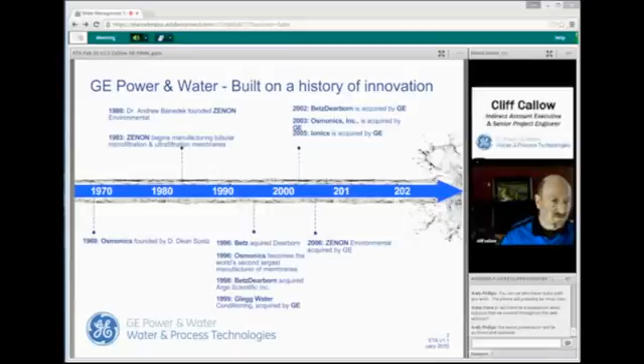So I belong to a group called the Indirect Group, and what that means is we go to market using carefully selected third-party companies throughout North America. These companies are local to you guys. You probably already work with them. They're a combination of OEMs that build equipment and provide solutions, distributors that have our technology on the shelf in terms of filtration, consumables, that sort of thing. We're value-added resellers that do part of the service piece as well. So all these companies allow us to bring solutions to you quickly with companies that are local to you.

Often these small businesses are second and third generation. So it's very rewarding for me.

So I have quite a large territory to cover. I have specialists that help me in doing that - equipment specialists, membrane specialists, filtration specialists. We also have a great inside team, great customer care team, aftermarket parts sales for our equipment and consumables, and then an overall technical support number that anybody can call, or the team mailbox, and look for a solution.

So my team covers North America with this network of third-party companies. There's 8 account executives like myself, 4 specialists, and 2 team leaders.

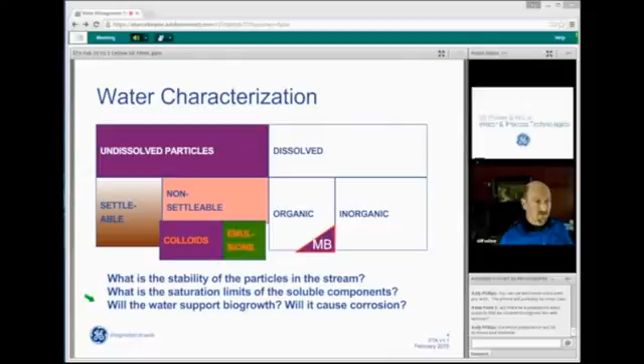Part of looking at a problem - and I learned this when I was at Toyota for a few years - you really want to define the problem in terms of a black box. What are all the inputs? What are all the outputs?

The black box concept helps us really define what this problem is really costing us, and what is it worth to solve. So it leads into the business case, because one of the big inputs and outputs always has to do with commercial constraints. Where does the money come from, where does it go? Could we take something that's a waste product now and reuse it? If we make it more consistent as a waste product, can we reuse it? So variability is a big thing you're looking at when laying out and developing a project.

Again, the first step is getting some data. What are you trying to solve? Some pilot information or trial information, and then getting funding for the project. You'll see a lot of the solutions I'll be talking about in my slideshow are fairly simple, so they're easy to implement. It's not a large capital project, so I think you'll be happy with that aspect of it.

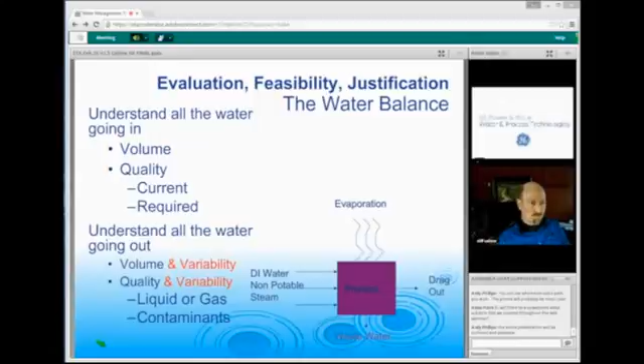So we talk about micrometers or microns. Filtration pore size is usually expressed as microns for undissolved particulates. When you get down into the dissolved materials, you're going to look at them in terms of molecular weight. Think of a molecule, think of a hydrocarbon chain, and so forth. Some good examples, we're all familiar with the size of beach sand, milled flour, how big a human hair is, and the technology to remove those would be some sort of particle filtration.

We'll be talking about depth filtration later on. We'll also be talking about hollow fiber UF.

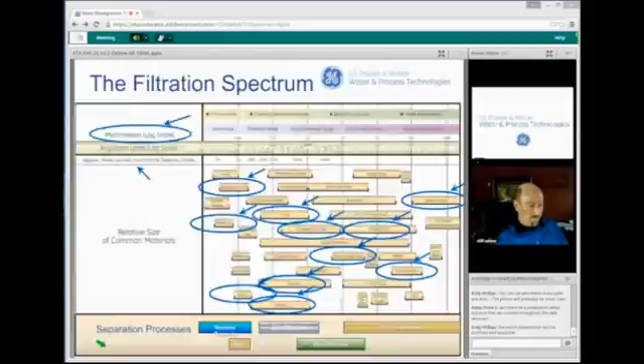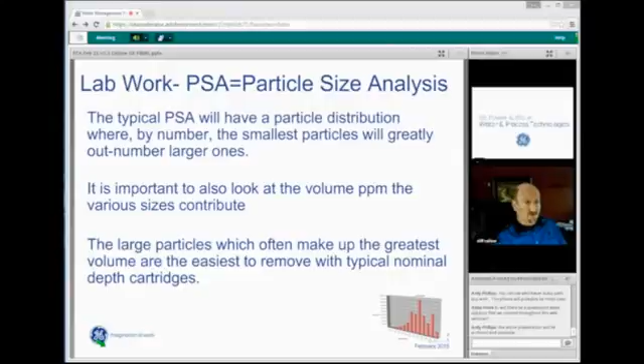Particle volume is important. We're going to see, when we talk about melt-blown polypropylene depth filters, how the void space is really important for filter performance.

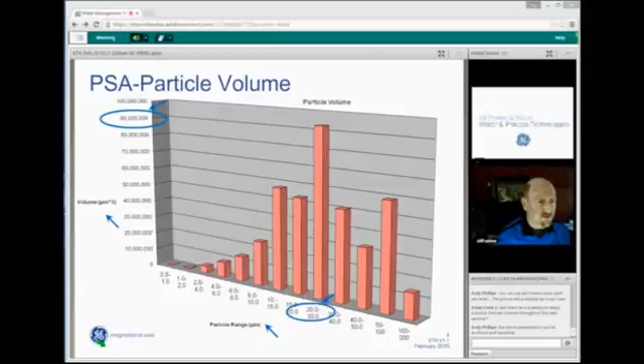And we're going to revisit these topics as we go through the slideshow. I'm just kind of building on this.

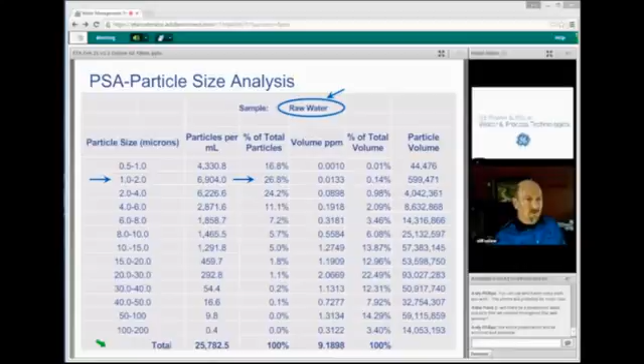Another part of the particle size analysis would be the tabular format. It gives the range of micron sizes in the sample of raw water in this case. In the 1 to 2 micron range, we had almost 7,000 particles per milliliter, which was 26.8%. Looking at these two slides, we'd say we want to remove everything bigger than 1 micron, but we're going to have enough dirt holding capacity to deal with the 20 to 30 micron range, which is where most of the volume is.

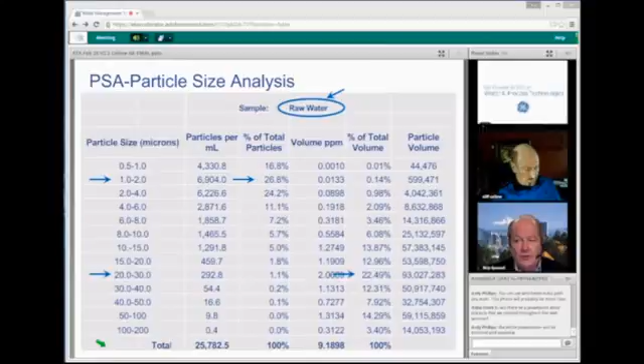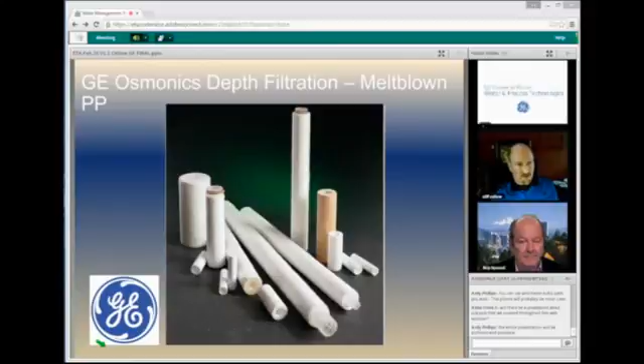So we're going to talk about depth filtration. It comes in a cartridge format, with all different lengths, end adaptions, and so forth. This is a GE Osmonics Heritage product line, made in America, with all the certifications needed for food, NSF. We work with polypropylene suppliers for the purest of materials, so GE is known for its very high quality and good value.

Before I go into how melt-blown polypropylene filters work, I just wanted to show you guys how they're made. It's kind of like cotton candy - we all saw that growing up as kids. It's molten polypropylene formed into a log on a mandrel that's spinning at a slow speed.

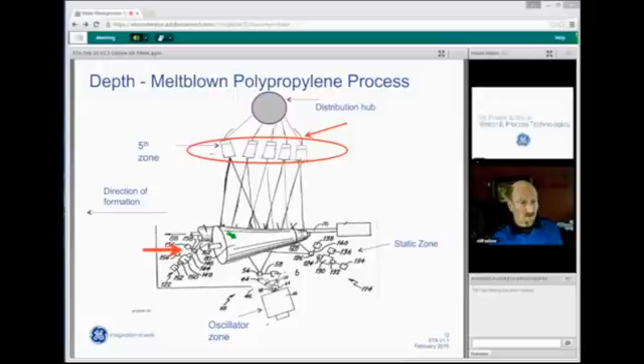At the top you see the heads - these are computer-controlled heads streaming out molten threads of polypropylene, developing a filter matrix along this log on a rotating mandrel. And why do we care? Because it all translates into dirt holding capacity.

In depth filters, the term graded density is important. In depth filtration, we're using the whole working radius of the filter, ideally, to remove dirt. And if the voids are larger on the outside and smaller on the inside, they're going to last a lot longer. So in this slide we see...

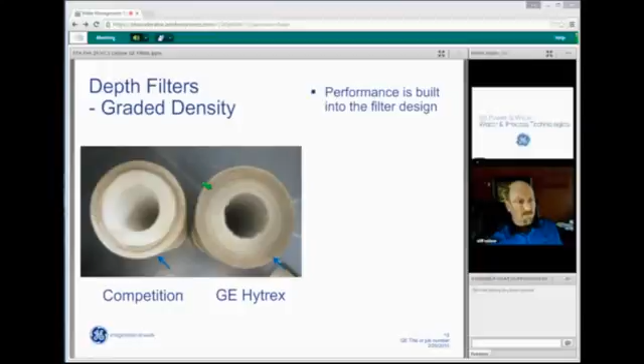because of the manufacturing process, the GE Hytrex is a graded density, and you'll notice that we've used almost the whole radius of the filter, whereas the one on the left is less expensive to make, so therefore the cost per filter is less, but the use per filter is going to be double what it is with the graded density.

So the Hytrex was invented by Osmonics in the early 80s, again an example of innovation. You can see on the slides that because this is not a graded density filter, all the particulate segregated into one layer, so you've wasted probably like 2/3 of your filter, whereas on the Hytrex, you've utilized all of the filter.

So again, we have lots of data on this: graded density will last twice as long as non-graded density. So when you're looking at something, obviously you want to look at the yearly cost of ownership, including how long it takes to change it, what's the disposal cost, all those things.

Then we go into a patented Z-Plex technology that came out in the 90s. You saw how they were manufactured - as computer-controlled equipment became more sophisticated, we were able to develop this technology. So Z-Plex is like super graded density, with smaller strands, made in the same way.

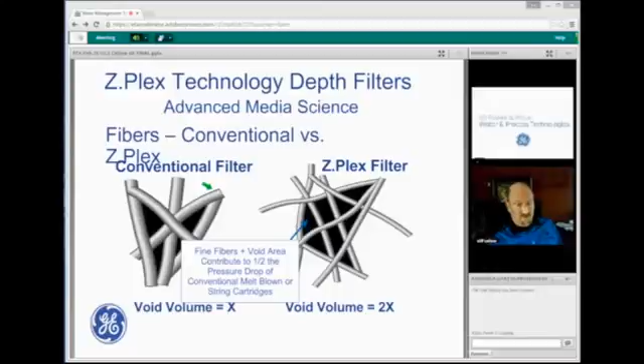So I call these super graded densities. GE Z-Plex technology, super graded density, will last twice as long as a Hytrex graded density that we came out with in the 80s, and 4 times as long as a non-graded density filter. That's a really important statistic to remember for the business case of what we're trying to accomplish.

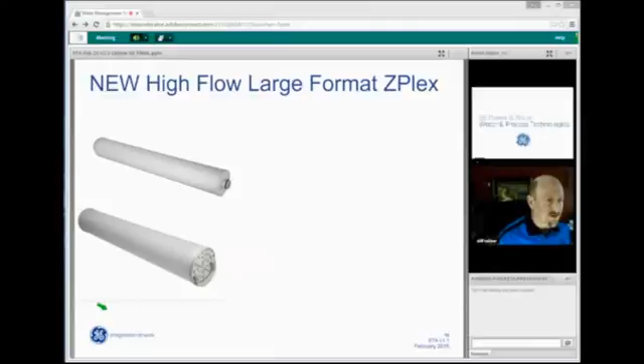Now, the newest family in our depth filters is the large format high flow Z. So we've taken that Z-Plex technology into a large format filter.

Large format means these filters are 6.5 inches in diameter and 40 inches long, and nominally handle 100 GPM. Most cartridge filters that everybody's familiar with are 2.5 inches in diameter. There's a lot of advantage to this large format. We did not come out with the first large format, but we've come up with the best large format, as you'll see in a minute.

So the high flow Z uses the Z-Plex technology in a large format configuration, where the competitors' designs are all some sort of pleated design. The pleated design would capture dirt on the surface. It doesn't have that graded density of void space that we would see in the depth filters.

And there's nothing like this on the market. We have tons of case history we've done in many industries, including food. This is the tool of choice for removal of fat particles, deformable particles like gels, particles of vegetables and fruits.

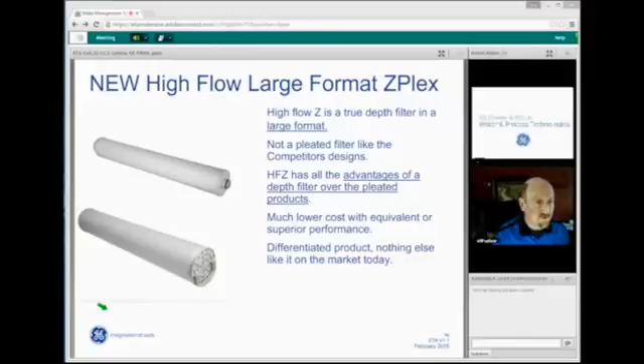We're looking at how are we going to implement reusing this water, cleaning this water up, at the point of use. Before we mix it all together, let's try to do it where we're washing the vegetables or washing the fruits or concentrating the juice. So it's simple technology.

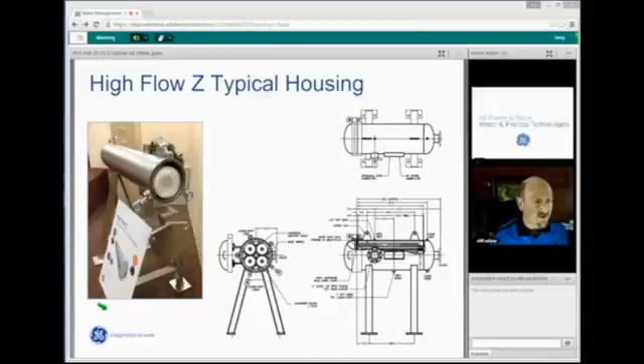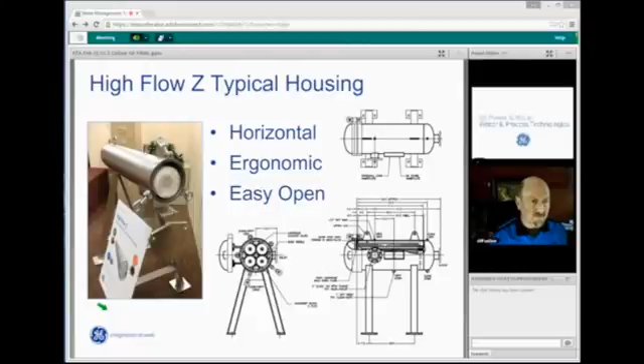Another advantage of the large format, it's in a horizontal housing, so it's very operator friendly. The handle is specially designed, it's ergonomic, it's easy to open, it's easy to look in. It's just a very nice operator-friendly configuration.

Here's some examples of why this large format is a great solution for plants. So here we have an example, both 400 gallons per minute. We could do that with 4 rounds, 4 high flow Z large format cartridges in a housing, versus 20 rounds of 2.5 inch. If anybody's ever changed out a 20 round filter housing, it's a lot of work. Operators are not happy about it. It's certainly not horizontal, it's a big deal. There's a lot of room for error in sealing. A filter is only as good as the seal at the bottom.

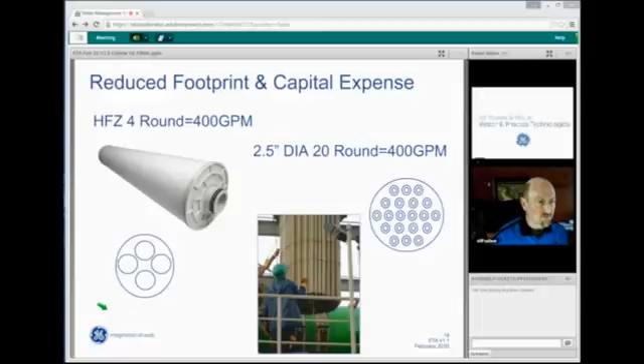So this is for the same flow rate, 400 GPM, 20 round versus 4 round. You decide which technology you'd like to have in your plant. It really gives you 5 times the flow rate of a 20 round. Dirt holding capacity, that's really where the business case is made. What's the filter life? What's the dirt holding capacity? These are all ASTM tests, and we have lab tests we can run versus an incumbent filter manufacturer.

So in this example, again, the same flow rate: the 40-inch high flow Z can hold 15 pounds of particulate, and that would be the equivalent of 5 2.5-inch cartridges at 2.6 pounds per cartridge. That's 6 times the dirt holding capacity.

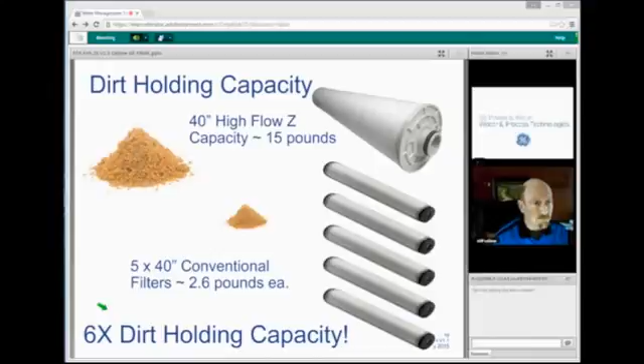I want to transition now into the removal of dissolved materials with spiral wound membrane elements. And we're going to come back to this slide. It's called spiral wound because it utilizes about 350 to 400 square feet of active membrane area, and the membrane is what does the work, as you'll see in the animation we're going to do in a minute, wound into a spiral format.

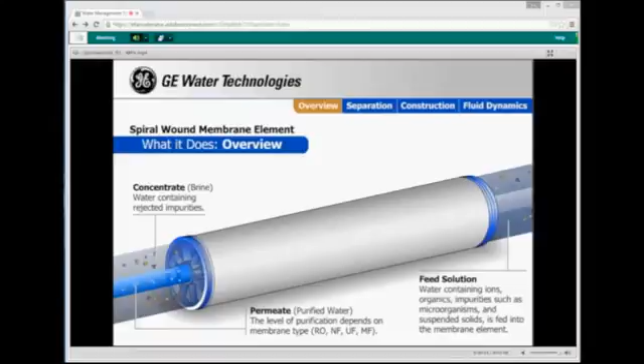So here's a typical cartridge simulating how it would look in a housing. From the right, the feed solution goes in. You can see the particles concentrated. On the other side, you'll see that the pure water comes out. So if we do a cross section here, we see the feed spacer, where we have the dirty side of the membrane, and the clean water membrane. Spirals are available not only as RO, but also as nanofiltration, ultrafiltration, and microfiltration.

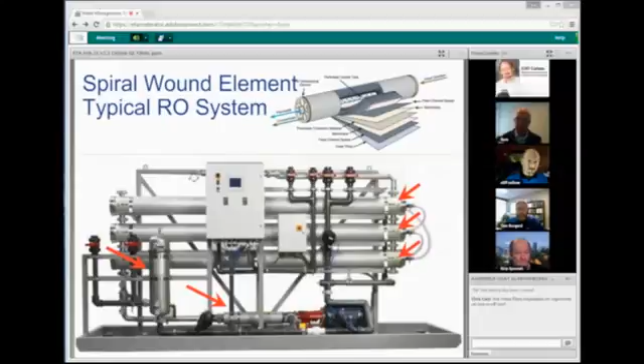Okay, so again, we're talking about spiral wound elements. We talked about that, so here's a typical, this would be a reverse osmosis machine. These elements are loaded into housings, you'll have a pressurization pump, and for pretreatment you'll have cartridge filtration in a housing. Everybody's seen these types of machines in their plants. We are a single source, so we make the membranes, we make the filters, we make the pumps, we make the equipment. So it's single source accountability.

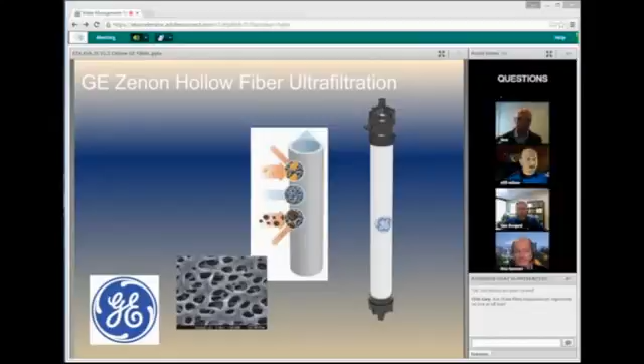That was part of our animation. Now I want to transition into the hollow fiber UF. This is kind of the heavy lifting technology, more towards the capital equipment side of things. You'll see how we go from a porous membrane into a lumen and into a module.

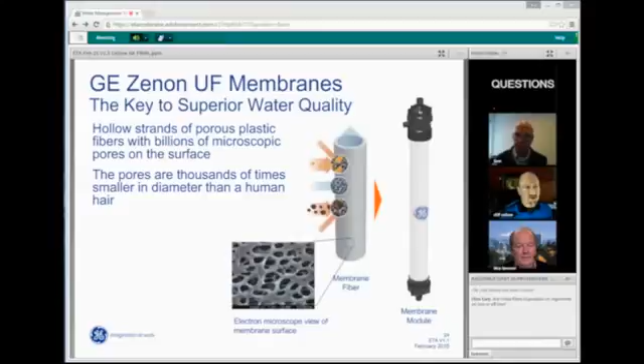This is a GE Zenon technology. Again, a very robust membrane, about the size of a piece of spaghetti. You have the contaminants on the outside, and the pure water is on the inside.

Pore size is 0.02, so it's going to remove viruses, cysts, and bacteria, which is an important attribute.

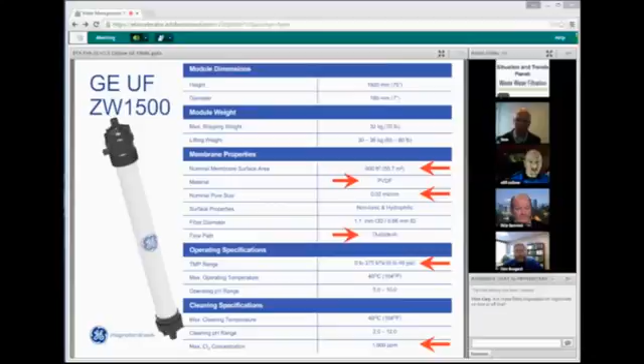Transmembrane pressure is 40 psi and below, so it's a fairly low pressure operating system, which translates into lower cost.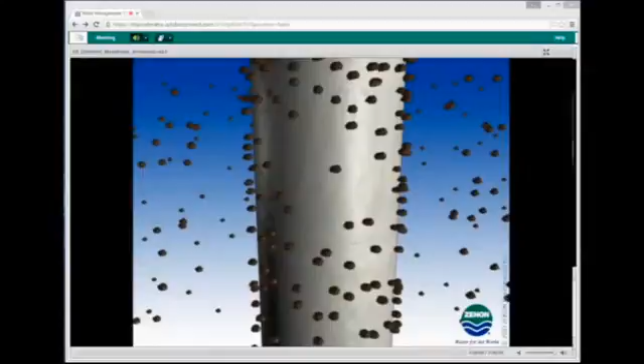If you quickly do the animation, the picture tells the whole story. So in a machine, it's the hollow fiber UF, outside in. You see the particulate building up on the outside, the filter cake, and the air scouring. Then you'll see we go through a cycle of back pulse, reversing the flow, using some of the filtrate to backflow, blow off the filter bed, and start the cycle over again.

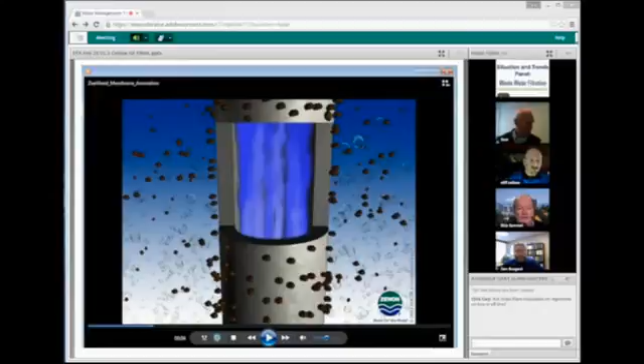So hollow fiber UF, again, it's a capital equipment play. You'll see it more as a retrofit to a clarifier - that's the classic area where it's put in. The new system could be part of a membrane bioreactor, and there's a lot of different ways to use it, but it's usually a larger system.

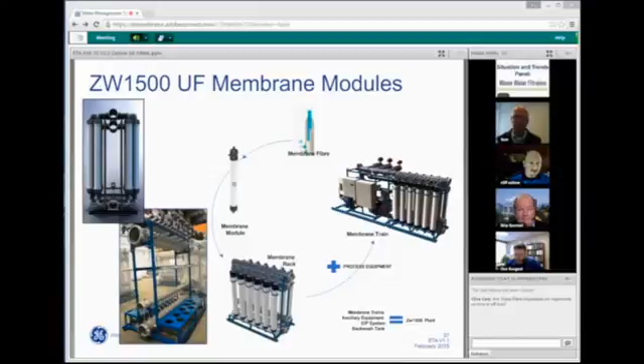So you go from the lumen, the hollow fiber, into the module. The modules are built into racks, and you can have a number of different racks. So my last slide, you'd see something like this. PVDF, again, where you've got to remove heavy solids - so not only food clarification, but mining, CPI, power, cooling tower filtration is what you're looking at.

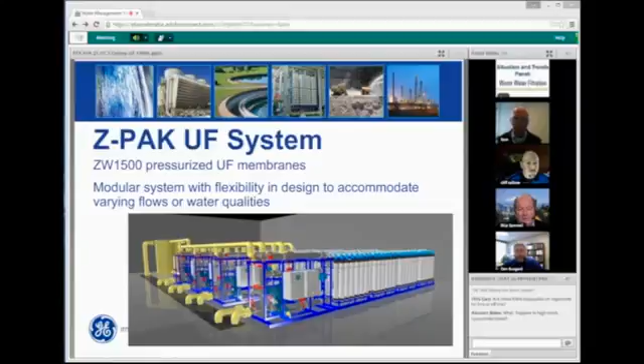Yeah, Cliff, I did want to ask a question. It's repeating really what Chris Carey had asked, and that is some of the things that you presented are disposable cartridges, and other ones are clean-in-place type cartridges. So could you talk about those real quick?

Yeah, I mean, again, I covered a big breadth of solutions, right? So the cartridge filtration is disposable, whereas the hollow fiber UF is part of a working system where you have a clean-in-place methodology. So you got to define what you're trying to do and look at the whole cost picture - what can we reuse, is there any BTU value to the filters that are contaminated. Lots of companies can recover metals from the filters, but yeah, you did pick up on the distinction. So the spiral wound elements, which come in reverse osmosis, nano, micro, and ultrafiltration - that's a clean-in-place technology. The hollow fiber UF is a clean-in-place technology.

Great, so Dan, you got a question or two? Yeah, I'd like to just forward on what some of the participants are asking, particularly in terms of what temperature ranges are on these depth filters, and what do you recommend for the reject?